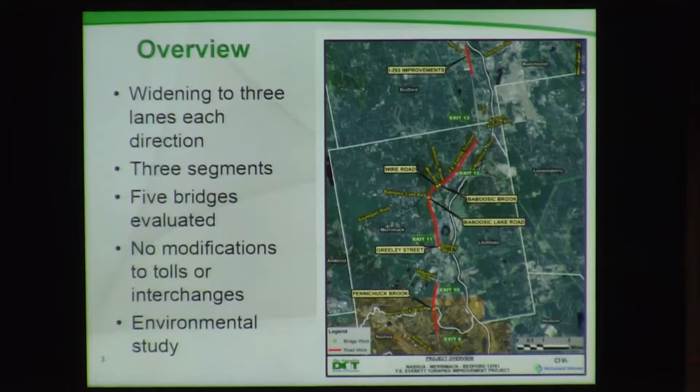So we're taking those 3 segments and going from a 2-lane section in each direction to a 3-lane section in each direction. Along those 3 segments, there are 5 bridges that will be improved. 4 of the 5 are complete bridge replacements, and 1 is minor maintenance and update of bridge rail.

The important part here also is what is not a part of this project. This project does not deal with tolling at all. This is a capital improvement project for the Turnpike, and tolling is not addressed under capital projects. Furthermore, this is focusing on the main line of the roadway and not the interchanges along this section of road, so there are no changes to the exits. Any of the work along the roadway ties into the existing exit ramps. And last but not least, obviously we want to know the environmental impacts of the proposed construction, so there's an environmental study.

So why is this project being done? What is the need? We need to improve the mobility throughout this corridor. This section of roadway is one of only 2 north-south corridors in southern New Hampshire, and it sees a large amount of commuter traffic that is currently not operating as efficiently as it could be. So we're going to relieve the congestion.

Currently, the roadway operates at what we would call a level of service D. With the projected traffic growth, that level of service is going to drop down to an F. Level of service is a qualitative measure of basically the flow of traffic on a road, and the ratings go from an A to an F. An A would be free flow, the desired condition, and F is stop and go traffic, obviously not desired.

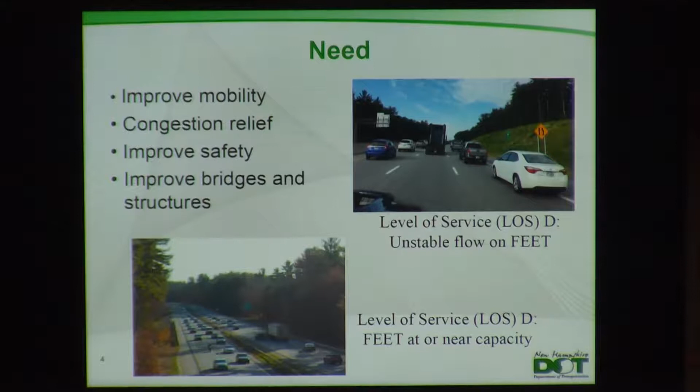Our increased capacity is in the 3 segments that we are going to be looking at improving. Currently, there's 2 lanes, 2 12-foot lanes in each direction with a shoulder on the slow speed side and only a 4-foot paved shoulder on the inside, or the high-speed side. With that, there is a grass median between northbound and southbound with a metal rail to protect from crossover crashes or such like that.

The proposed condition, like I had mentioned, is going to add a lane. So you're going to have 3 lanes in each direction, keeping that 10-foot shoulder on the slow-speed side and creating a 12-foot shoulder on the high-speed side.

Again, this is a tremendous safety improvement because it allows for people to get off the road if there is an accident or if there's an issue or breakdown or anything. They don't have to be in that lane. With a 4-foot shoulder, you can't get off the road. So with that, the metal railing will be replaced with a concrete barrier, and this is much safer because it will keep cars from crossing from one barrel to the next.

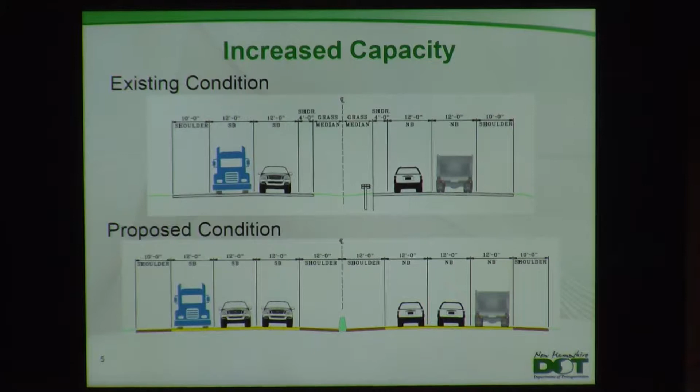So I just want to touch on the 3 different segments that we're looking at. The southern segment is here, starts in Nashua and runs to Merrimack. It's just north of exit 8 and runs about 1.7 miles to the north, just shy of the exit 10 area in Merrimack. The major bridge structure in this section is the Pennichuck Brook Bridge, and we're going to talk about that.

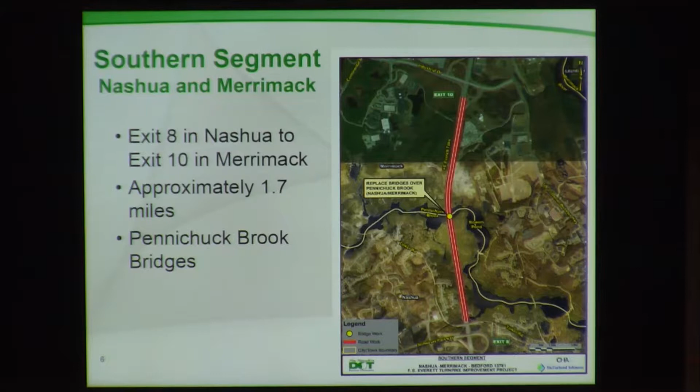So there's a picture of the Pennichuck Brook Bridge. Pennichuck Brook runs into Bowers Pond, or is part of Bowers Pond. That whole water system is part of Nashua's drinking water supply, and the planning that has been done so far and the construction alternatives that have been looked at so far do everything to protect this as a top priority during construction.

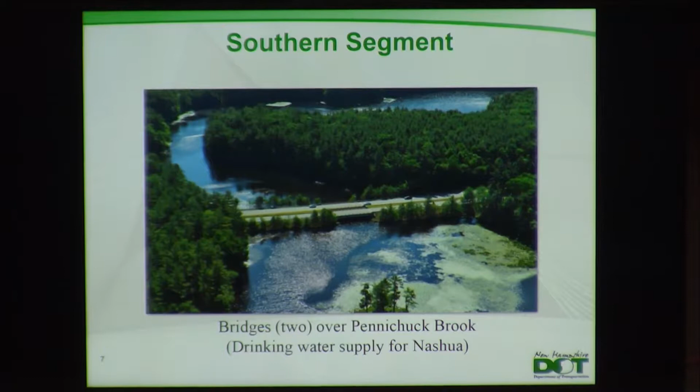Here we see the same set of bridges for the existing Everett Turnpike over the Pennichuck Brook. Here you can see there's clearly 2 bridges. These 2 bridges are going to be replaced with 1 bridge that is 6 lanes wide to accommodate the 3 lanes in each direction.

Construction is going to be done solely to the east side of these bridges, which will be the right as you're looking at this. What that does is allow all the construction to be done on one side, so you're minimizing the impact to the water body. It's all along one side.

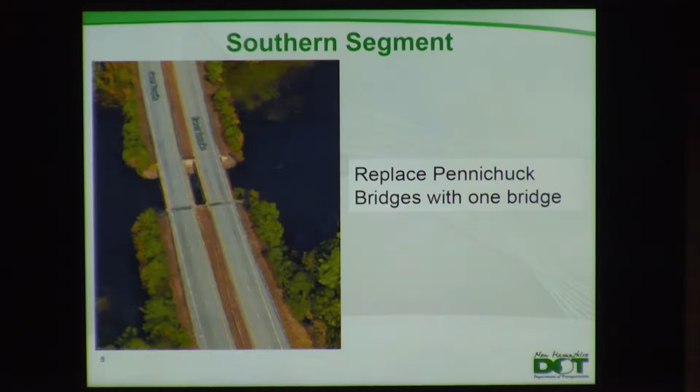Another aspect of construction is that these 2 bridges currently are, I think, around an 87-foot span. They're going to be replaced with a single 100-foot span bridge, which allows the abutments to be built outside of the existing abutments, so not in the water. Again, doing everything we can to try to minimize the impact to the waterway.

One of the questions that came up last time is, well, how is this going to be built and what's the traffic going to be like? The commitment under building these bridges and all of the improvements is to keep 2 lanes of traffic open at all high flow traffic times. For the most part, there's going to be 2 lanes in each direction open at all times.

There will be occasional lane closures, maybe during the middle of the day or evening, or possibly rolling roadblocks using state police when the construction does have to impact one of the lanes. But again, that'll only be done at low traffic volume times.

Our middle segment here starts just in the vicinity of exit 11 and goes 5.1 miles to just south of exit 13, which is the Bedford Tolls or Airport Access Road area. There are 3 bridges in this section that are going to be replaced: Baboosic Lake Road, Wire Road, and the Turnpike over Baboosic Brook.

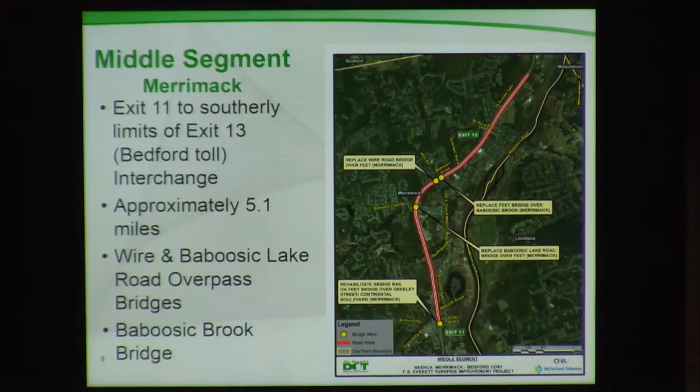This is the exit 11 area. Right at the beginning of this segment is the Turnpike over Greeley Street. This bridge has already been built wide enough to accommodate a 3-lane section, so there's going to be very minor work on it, just maintenance and upgrading of the bridge rails to meet current safety standards.

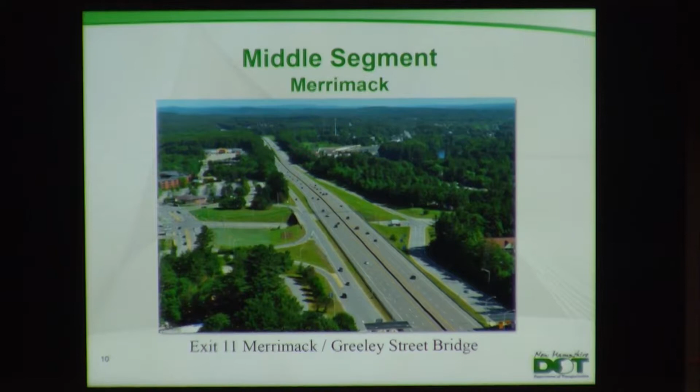Baboosic Lake Road. Currently, this bridge is on the DOT's red list, which means that one or more of the major structural components is rated poorly. So this bridge has needed work anyways, but it needs to be replaced to allow the new 6-lane section underneath. Right now, the current span is not long enough to allow 3 lanes in each direction underneath.

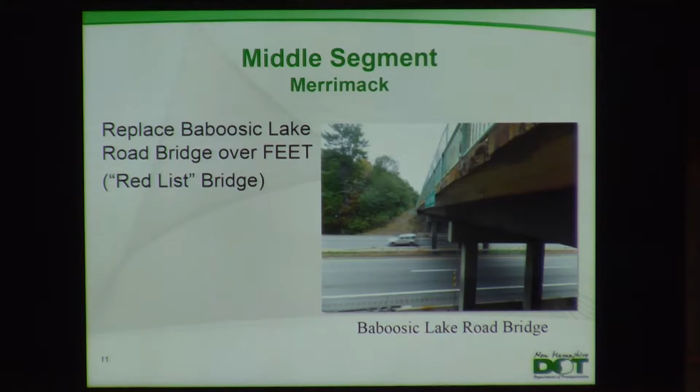Baboosic Lake Road is a very heavily traveled local road, approximately 9,700 cars per day. Just to the east of this bridge are the Merrimack school systems, the police department, fire department, town hall, and I believe the court building as well. So there's a lot of facilities the public needs to access to the east of this bridge.

So in order not to impede traffic in this area—construction always has some impact, but to have the least amount possible—a temporary bridge is going to be built next to the existing bridge. That'll be a 2-lane bridge to maintain the 2 lanes of traffic at all times. Once the temporary bridge is built, the existing bridge will be torn down and a new bridge will be built in its place.

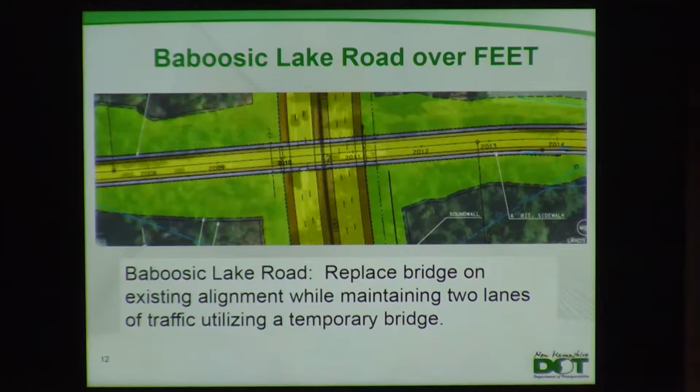The next bridge up the Turnpike is Wire Road. This serves as a significant east-west connector for Merrimack to get across the Everett Turnpike. It has about half the traffic of Baboosic, with only 4,400 cars a day. What's being proposed here is alternating one-way traffic, using temporary stoplights placed at either side of the bridge to allow only one directional flow over it.

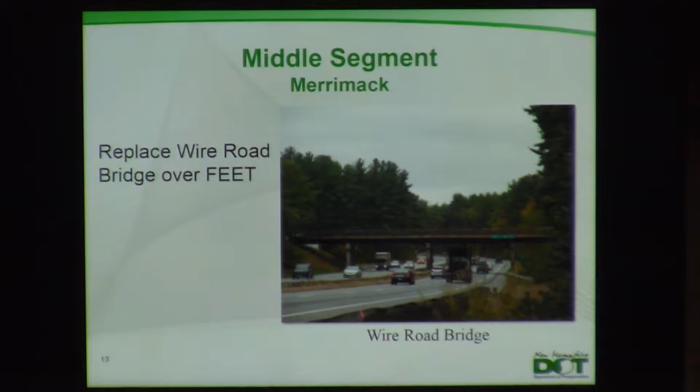During construction, we're going to maintain one directional flow over this bridge on the southern side. That allows the northern half of the bridge to be torn down and a new bridge built as close as possible to the existing one while maintaining that one-way traffic.

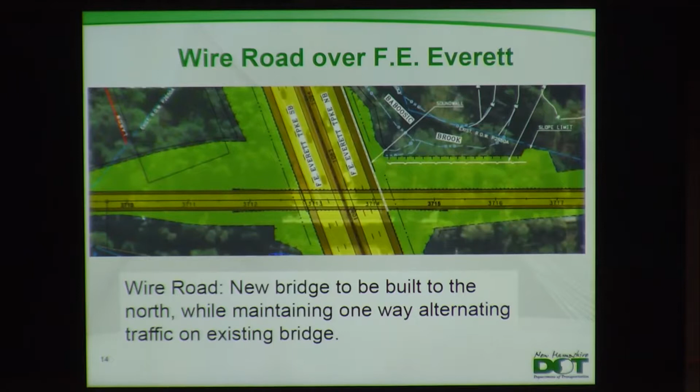Just to the north of Wire Road is the F.E. Everett Turnpike over Baboosic Brook. This is a very small bridge, just barely over culvert size. But in this area, the existing turnpike and this bridge do not meet the criteria for the 100-year flood design.

So we are going to be looking at raising the F.E. Everett Turnpike approximately 3 feet to meet the 100-year flood standards, which would replace this bridge with a larger opening to allow better flow and to handle any flooding in this area.

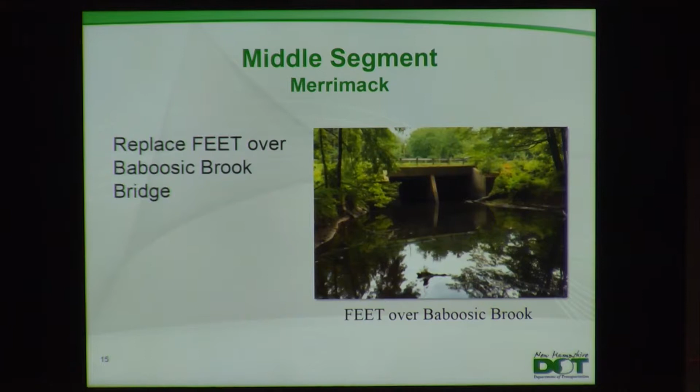One of the other major bridges in the middle segment is over the Souhegan River, also known as the Merrill's Marauders Bridge. This was widened a few years back—there was deck repair and replacement, and it was widened. So this bridge is significantly wide enough to handle 3 lanes of traffic in each direction. While there will be road work coming into this bridge and restriping across it, there's really no work on the bridge itself.

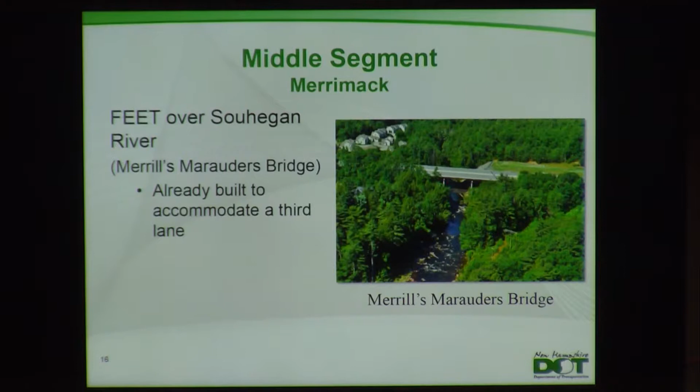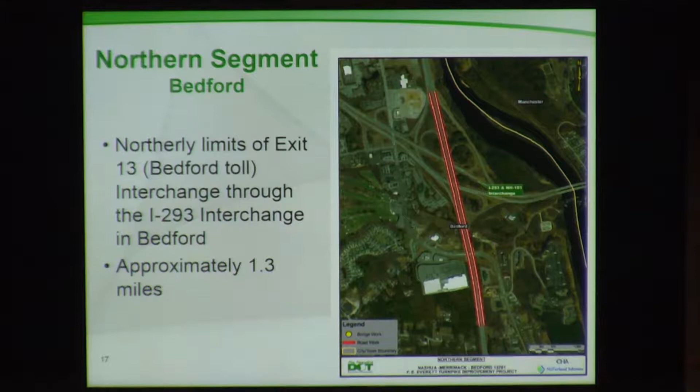That gets us to our last segment, the northern segment, which starts north of exit 13 and goes 1.3 miles up to the 293-101 interchange. There are no major structure repairs on this segment, though there are some major bridges: the new Route 3 over the Everett Turnpike, just built a couple years ago, built with a large enough span to accommodate the 3-lane section underneath, and the 101 bridge over the Turnpike, which also spans long enough to accommodate the 3-lane section.

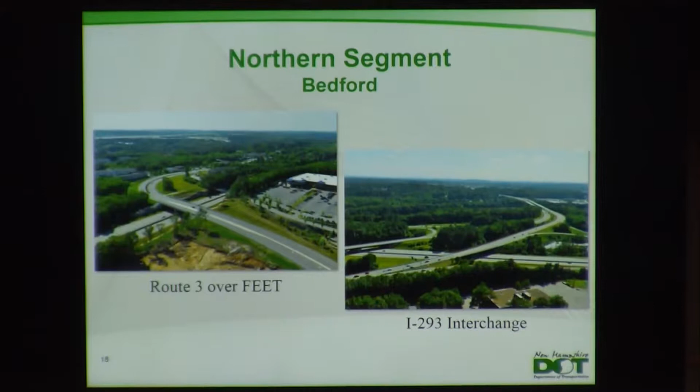So again, the approach here is to add a 3rd lane in each direction, which will be carried all the way through the interchange. We are not reconfiguring this interchange. As you can see in this graphic, we're tying into the existing ramps as soon as possible after adding that 3rd lane. We're not redoing the whole interchange, it's just capacity through this area.

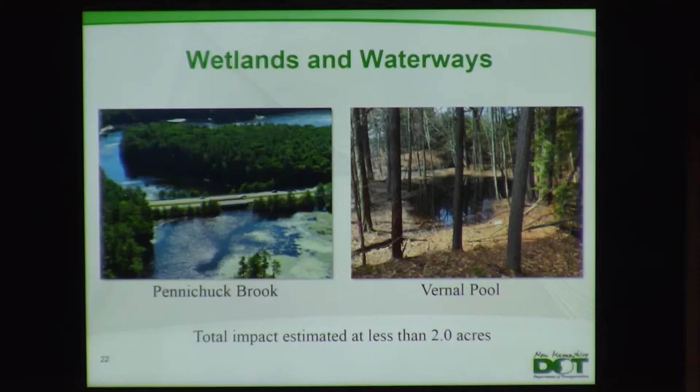There's a few vernal pools, fringes of vernal pools that will be impacted by the project. None of those happen to be in Nashua. And several other wetlands have lesser impacts throughout the corridor.

Water quality: the current water quality treatment requirements for stormwater runoff are fairly stringent. We are trying to meet those requirements by constructing new extended detention basins along the corridor. Approximately 20 detention basins are proposed all along the widening area. They'll treat the existing pavement as well as the proposed new pavement, and we think it will be a net improvement in the water quality of runoff from the roads.

We're also attempting to minimize salt usage where possible, looking at management measures such as applying brine applications prior to storms to minimize salt usage.

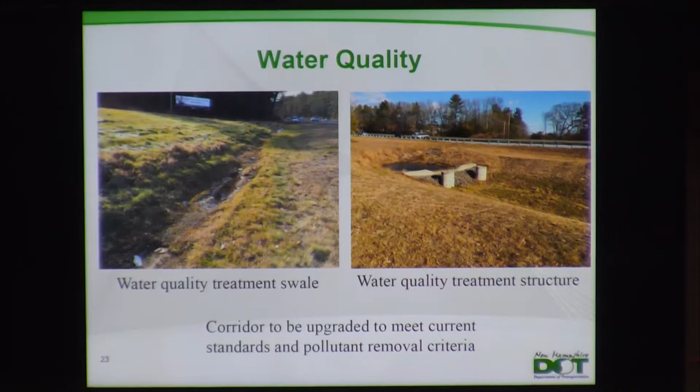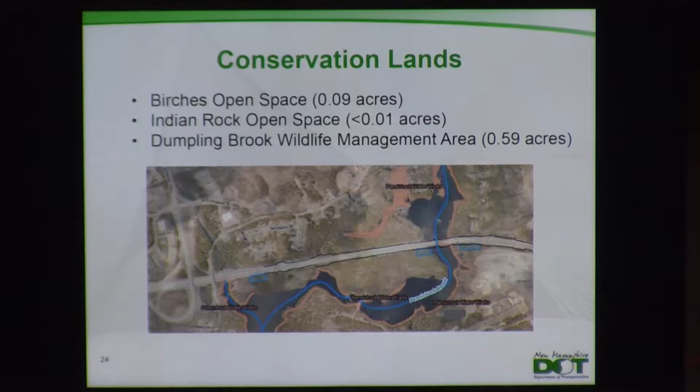There are 3 or 4 conservation lands that may be affected by the project. Actually, we're looking at another one up in Bedford, aren't we? Yeah. There are 2 town-owned parcels in Merrimack, Birches Open Space and Indian Rock, where very small portions will be impacted. They're shown here. Dumpling Brook Wildlife Management Area in Merrimack, about 2/3 of an acre would be impacted for the construction of a detention basin, which we need to provide water quality treatment. And there's a 4th, what we think is a private conservation easement just recently enacted up in Bedford that may be affected by the project. We're looking into that.

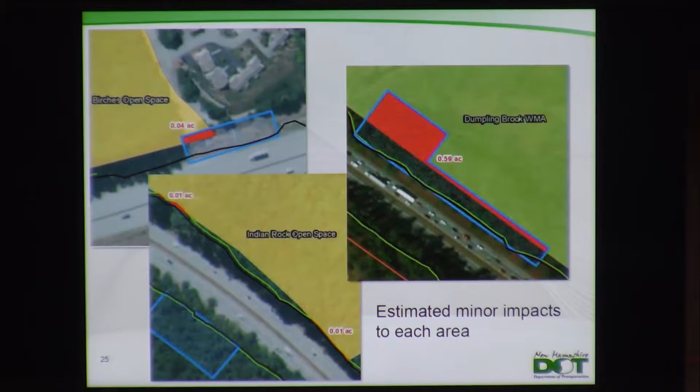A noise study was done along the entire corridor from exit 8 in Nashua up to the 293 interchange, including the segments that were previously widened. We used the Federal Highway Administration's traffic noise model, which is the standard model for evaluating noise impacts and the effectiveness of noise barriers along highways.

In running the traffic noise model, we make noise measurements on the ground at all of the neighborhoods along the corridor, not all of the individual residences, but at representative locations at all of the neighborhoods. We count traffic volumes, we plug the numbers into our model, and if the model spits out the same numbers as we measured on the ground, or similar numbers, then we know the model is accurate. And we did verify that the model appears to be accurate.

We then run the model to look at noise impacts, which are noise levels of at least 66 decibels during the modeled peak traffic hour periods in the future design year when the traffic numbers are greatest. So it's essentially a worst case situation.

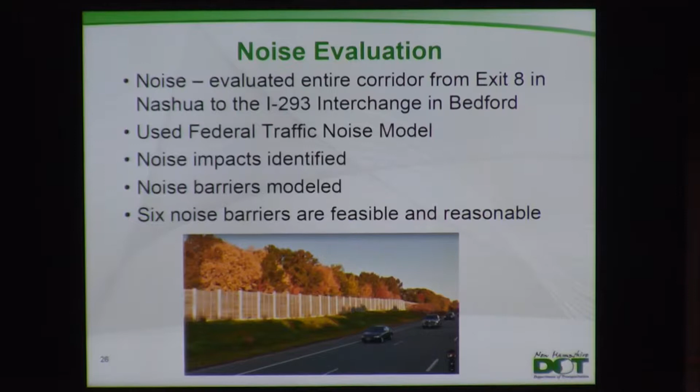If there are noise impacts, we will model noise barriers to determine whether they can be feasible and reasonable, and therefore can be proposed for construction. John Evans is here from the Department of Transportation and can give you a more detailed perspective on what feasible and reasonable means. The bottom line is we found 6 noise barriers to be both feasible and reasonable. Those happen to be in the town of Merrimack. I'll be glad to discuss those with you more if you'd like.

Historic resources, that's something we're currently looking at. There's a number of structures that are over 50 years old and could be eligible for the National Register, and we're consulting with the appropriate agencies to determine whether those could be affected. There is an opportunity for individuals and organizations who have an interest in historic resources to become formally named consulting parties. Let us know after the meeting if that's something you would like to pursue, and we'd be glad to get you started with that process.

And now I'd like to turn it over to Wendy Johnson, DOT Project Manager, who'll tell you about the outreach and other efforts.

Thank you, Jed. Okay, so the public outreach efforts for this project—this is a very large corridor project, and we're very interested in hearing what people have to say. I know on some projects we don't necessarily come out as much, but we're really trying to do a really big program with this project.

We've already been out to several public officials meetings, specifically with different municipalities. We've been meeting with public works directors. We're really trying to get a handle on what would be the best design for this particular project.

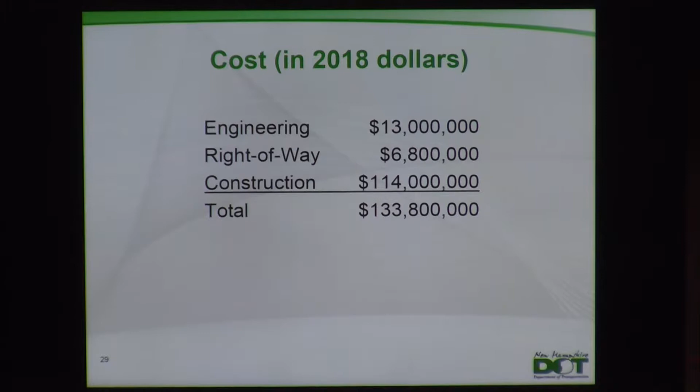Process and schedule: the kickoff to where we get to the next phase is the environmental study, which is going to be published in the summer of 2018. From there we get to that public hearing, which concludes the preliminary design process, and we go through a whole series of steps after that point.

We can have a public hearing, but we need to have a successful public hearing. That means we need to find necessity for the project. So we do a finding of necessity that becomes a record of decision that says yes, there is a necessity to build this project, and everybody's on board with building it.

Once we get that in our hands, we move forward with the final design process, and that's going to occur between 2018 and 2020, maybe 2021. I'll get into that in a second.

We'll continue to have those public meetings. We'll continue to look for the input. We'll work with municipalities on any utility designs that need to be done, because we will likely impact utilities a lot more in Merrimack than in Nashua.

And we'll be looking to execute agreements. Any utility agreement that happens has to be processed through us. And another thing that we'll need to do—Nashua doesn't have any, but we have sidewalks that we're constructing in Merrimack—so they'll need to enter into a sidewalk agreement with us, meaning they'll maintain the sidewalks.

One other thing we need an agreement for with every municipality is a municipal work zone agreement, which means that when we come into town, we have the right to control traffic within whatever the area happens to be. So we'll be looking for all the towns and the city of Nashua to execute a municipal work zone agreement with us.

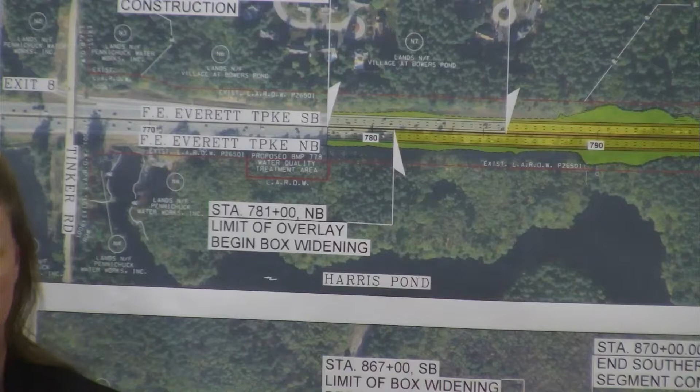I'm sorry, what was that? I'm going to move the microphone over here. So ma'am, did you have your question answered acceptably for right now, or can we stay later and talk about this in a lot more detail?

No, I think that obviously there's more homes than just 8 homes in that neighborhood, and certainly all the homes are impacted by noise. It would be interesting to better understand the decibel ratings in that neighborhood, and I think that might be something the department might want to address with a meeting just with our homeowners association, where we could discuss that and have some local public officials there as well. I know we're taking up time from others, but I think it's a concern that we would like to have a better understanding of what the data showed. I mean, I get that. I mean, I can— well, I want to move on to further questions.

But the noise study will be posted on the website when it's complete, and it will be extremely detailed, with very specific information about the decibel levels residents will see reduced or increased. That will be available for public comment. And I just want to get a few more questions in. That'll be basically summarized in the department's environmental assessment, so the results of that will be summarized in that.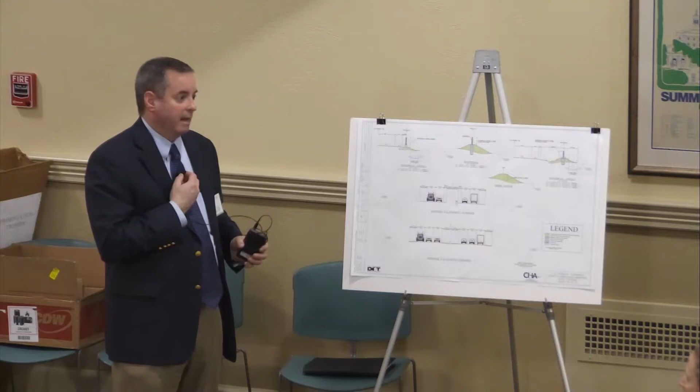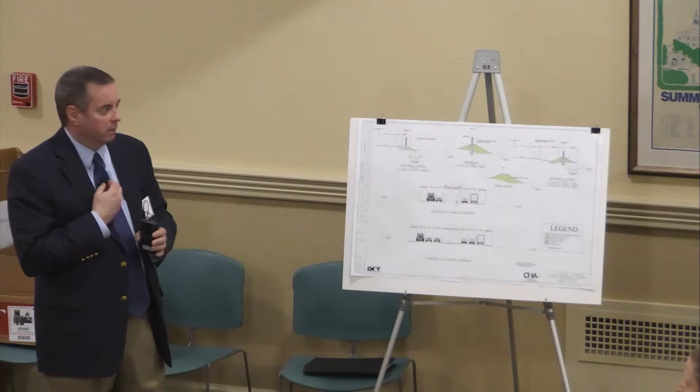And I want to qualify that congestion in some areas is at peak traffic hours, the commuting hours. But as I pointed out in my earlier presentation, it's currently operating at a level of service D and will be moving towards an F. The traffic study shows that as traffic grows, looking out 20 years from the end of construction, which is in 2024-25, it does get back towards a level of D-type service, but that is 20 years out.

In 2024, I think we were looking at a level of service of B, and I'd have to look that up, but it is by road segment, by exits and stuff like that. So it does vary along the corridor, but it does improve the existing conditions.

Anyone else? Absolutely.

My name is Steve Dukran. I'm from Nashua. I have a question about a noise study.

Does the department ever go back, say during the life or end of the design life of the highway, to check if their model was effective or accurate? Do we go back and look at it after the fact?

Not really. This is a federal highway noise model, and the accuracy, honestly, they've been using this since the 80s and continually updated it through various new versions. The accuracy of the model is pretty good. It's really the only tool out there for measuring noise impacts on a highway facility like this. So typically, no, we wouldn't go back out in 20 years to relook at it. But it has proven to be very accurate. There are multiple studies that have shown it to be accurate. So again, we typically wouldn't go back to look at something we believe to be accurate.

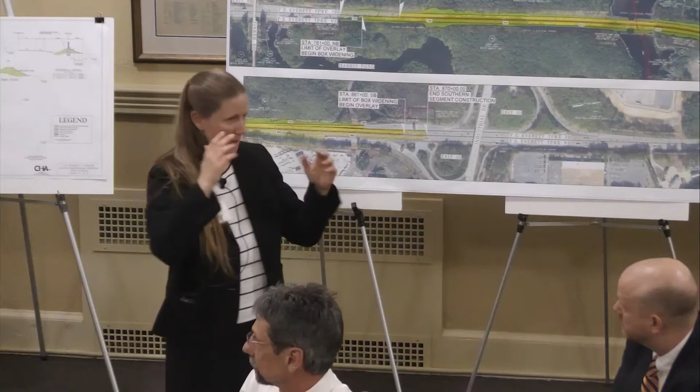So what the smart work zones do, I'm trying to pin this up so I don't keep shaking. Is that better? The smart work zones are similar to what you see on I-93, where you're driving down the road and it says so many minutes, so many miles. We keep track of that. We're going to post where there's blasting delays and stuff like that, so you'll see those sort of things. We found that when we use those smart work zones, we actually keep the motorist on the travel way because he knows it's only going to be 5 minutes or 7 minutes or a 2-minute extra trip this time. So we'll be using those, and they'll be employed at key locations.

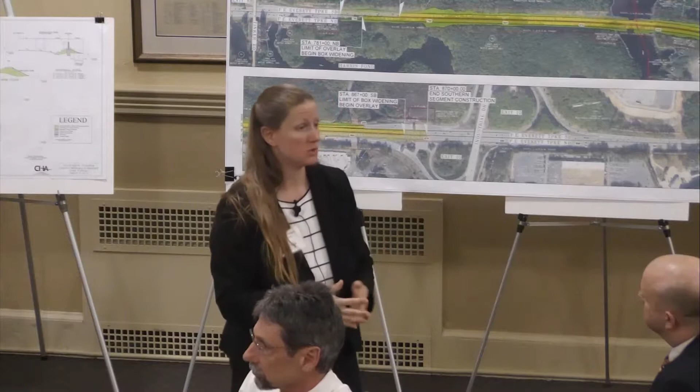We haven't done the design yet, but for instance, when we've done projects on other interstate facilities, sometimes we do put them on some side roads. We put them prior to exits so people can make the decision to stay on the roadway where they should be. It's a good point, though.

I just have a follow-up regarding the noise ordinances that you have, and I think Steve and I are aware of the same situation. When were those last updated, the numbers you're using now? I'm sorry, when updated? When was the information you're using now in your noise studies, when was that last updated?

This uses traffic data from existing traffic conditions in 2016, and the future conditions are 2044. That's the current traffic data that the highway engineers are using for this project. The noise information? So this is a new study for this project.